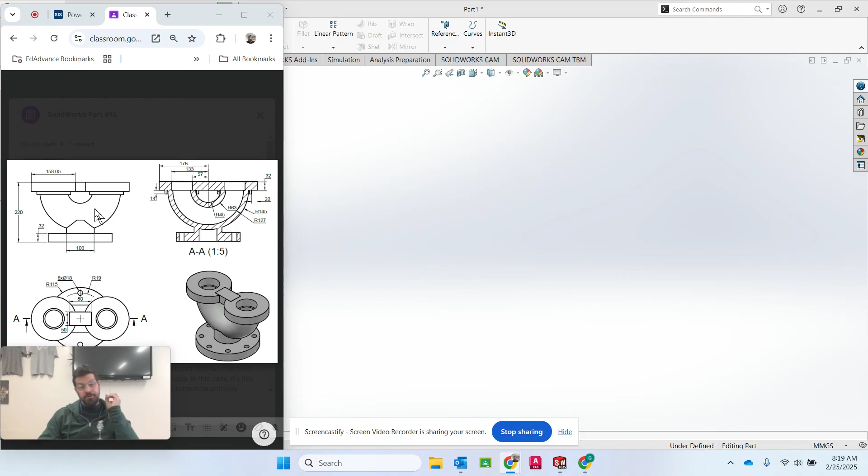And if you tried to figure it out on your own, it might take you forever. That's part of the purpose of these videos: to give you new tools and help you understand how SolidWorks can be used, so that you don't spend forever trying to figure out things on your own.

Okay, so I'm over here in SolidWorks, and I am going to teach you a new thing. So far we've done extrude boss base and extrude cuts. We've done revolved boss bases and revolved cuts.

Today we're going to do something called a swept boss base and a swept cut. Sweeping just means you're going to take whatever profile you want and sweep it along a path which you've defined by putting out a line somewhere.

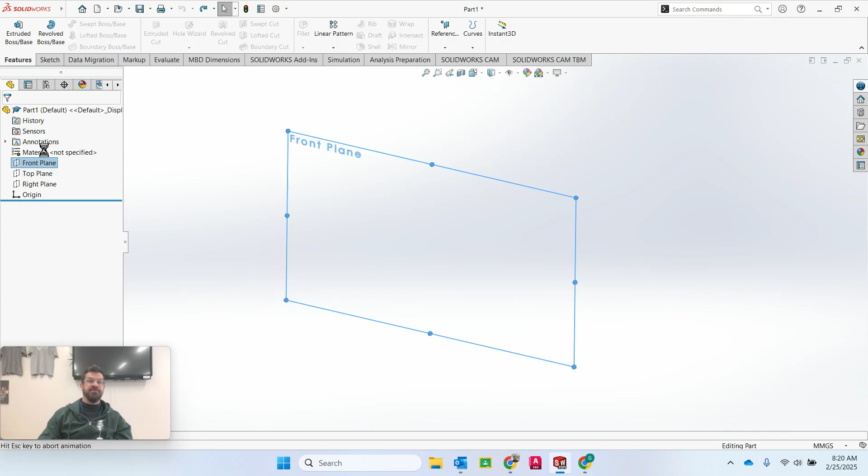Okay, so we're going to start here. I'm going to make a new sketch on the front plane. Let's just make a simple little circle, so it looks kind of like the tube on assignment number 15, right? I'm not going to bother to dimension it because I don't really care what the dimensions are here.

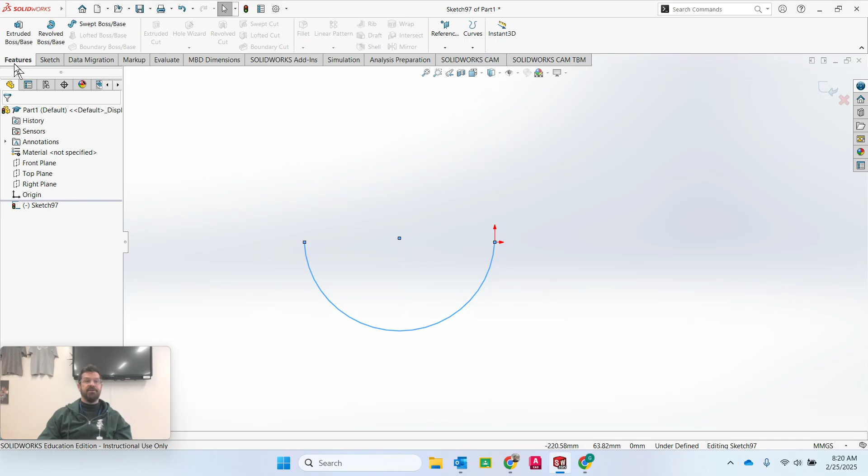So I got this semicircular line. It is a line, it has no depth, it has no solidity. It is just a line that is curved, right? And if I have a line that I want to serve as the pathway of a shape that I want to draw out along that pathway, I can go here to where it says swept boss base.

It sweeps a closed profile along an open or closed path to create a solid feature. So when I click on it, it gives me this dialog box over here on the left, with two choices first: sketch profile or circular profile. Let me just show you circular profile first because it's the simplest one. If I click on circular profile, you can see right away it took that line and made a circle around it, tracing a circle out all along the length of that curved line.

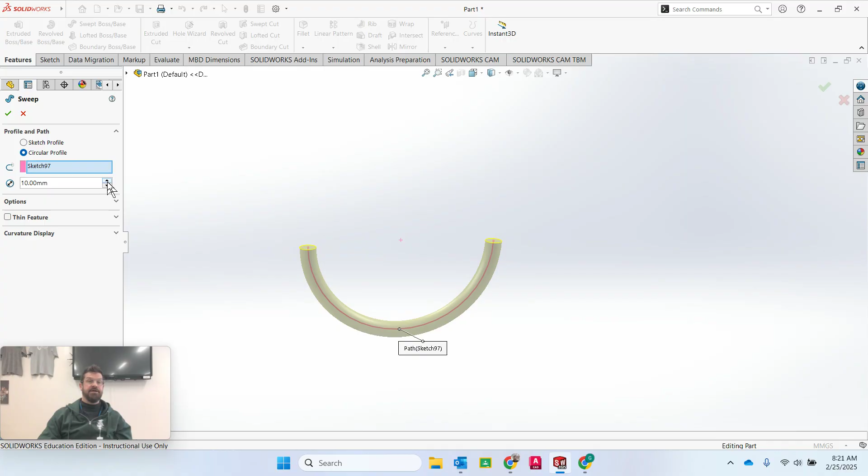It thinks of this as a solid feature, right? It is a solid tube, right? And I can change how thick it is, I can make it fatter. Eventually it's going to get so fat that SolidWorks can't figure out what to do with it because all the circles kind of join into each other. So that's too fat, let's just leave it as like 20, right?

Options, don't worry about these. Thin feature, let me talk to you really quickly because I know some of you have accidentally clicked on thin feature before. Thin feature takes a line and gives it some thickness as well. So if I click on this, you're going to see it took the line that made the circle. If I click it off, you'll see again there's this yellow line right here, and that's the line that is 20 millimeters around my sketch line.

If I click on thin feature, it's going to take that line and turn it into a line with a little bit of thickness, and the thickness is determined by whatever number's in here. So I can make that line a little bit thicker too if I want to. Let SolidWorks think about it for a second. All right, I can make it thicker or thinner.

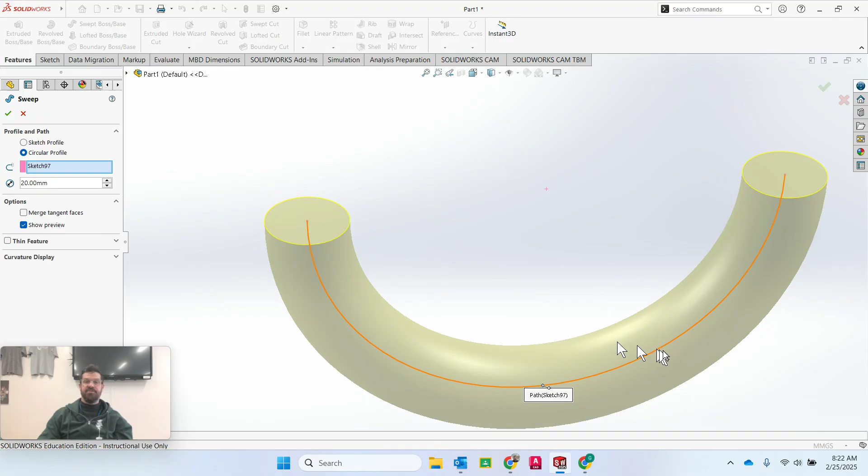I can make it one direction, I can make it two directions, I can make it mid-plane, just so it builds out from the center outward, and that's what that does. I don't want thin feature here, okay, so I'm going to click off of that. And so that's essentially what the swept boss base tool does.

Now let me show you this: it does not have to be a simple semicircular line or a straight line. I can take the spline tool, right, and I can go like, okay, boom, boom, boom, boom. I want to trace out some shape along this thing.

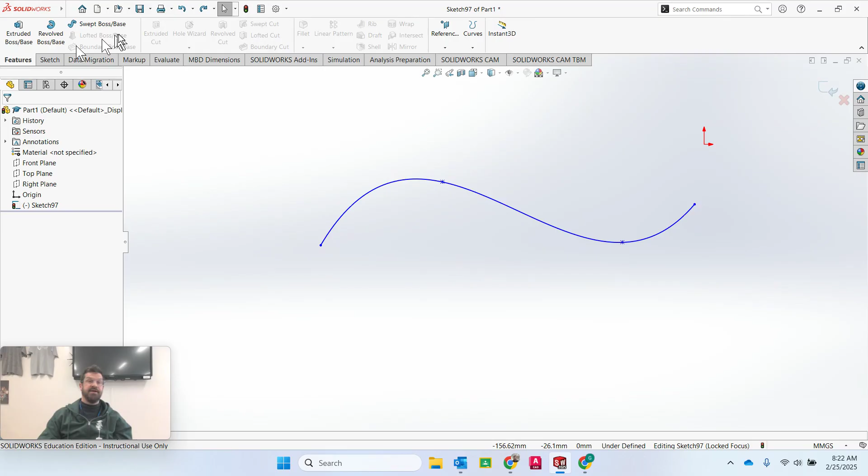So if I do swept boss base again, I can take this and do circular profile. And if I click on the pink line right here, you still need to select the path that I want it to trace out. It's circular, I'm going to click that, and it's going to trace out a little circle path along whatever line I've drawn. Okay.

The only time it runs into problems is if you have a bend in your pathway line that's really tight. Sometimes the bend is too tight for it to figure out what to do with, and you'd have to come up with a different solution.

So that's what happens when you take a circle profile and sweep it out along a line. It creates a solid shape that matches the shape you just did, okay?

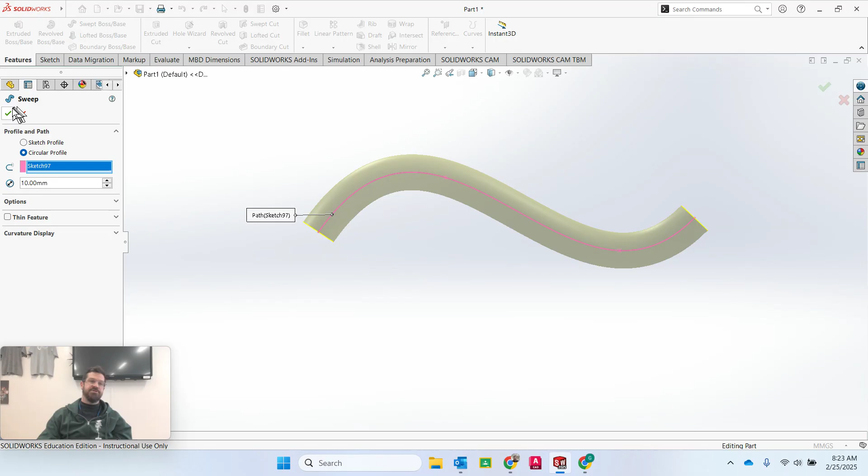Now let's take a second here and go back. So I got this, we'll leave that there, cool with this line, this spline, right? But say I want to trace out a more complex shape than just a circle. Sometimes you want to do something cooler.

So let's look at what happens if I want to trace, for example, a hexagon out along my line here, my spline. The first thing I have to do is draw my hexagon. My hexagon has to be located at the end of one of the points I'm trying to sweep it out along. Let's say I want to make a hexagon right here at that end point.

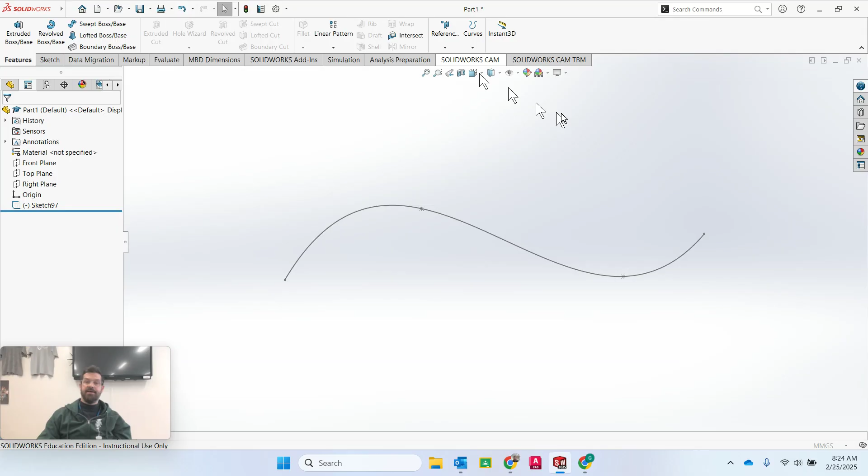So let's take a second to make a quick plane. I'm going to say my first reference point is the line, and the second reference point is the dot. And you can see it just made a plane for me right there. It's fully defined, I can hit OK.

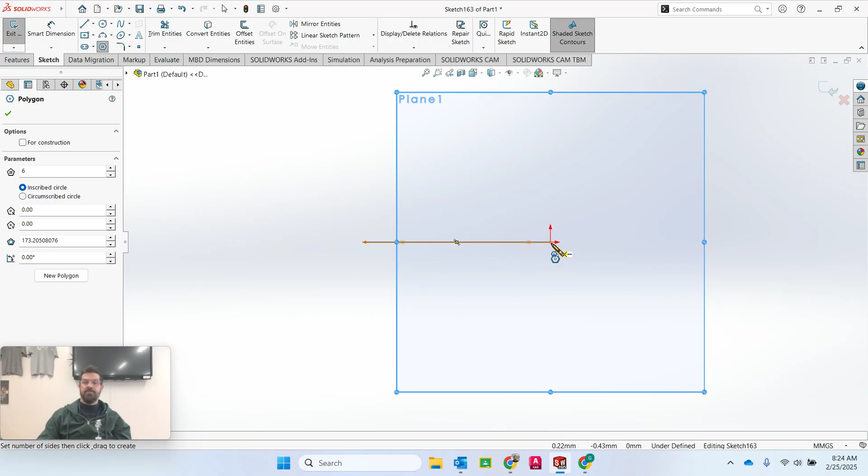Now if I want to take that plane and make a new sketch on it, I can do that. Let's say I want to make a hexagon, and I'm going to locate it right here. Make that horizontal. Excellent. I'm not going to bother to dimension it because I don't really care.

If I kind of move this around a bit, you see I have a hexagon located right along the end of that line. And let's say I want to sweep that hexagon along the length of the line.

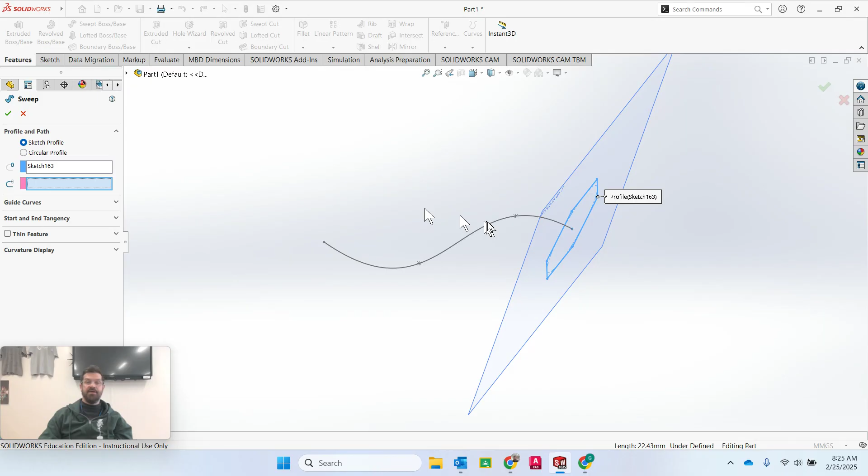I have to identify in this blue line what sketch I want to use. It already knows I want to do the sketch here, but you might have to pick on it. You might have to go into your feature tree for a second and figure out where the shape is that you want to sweep out. Then on the pink line you say what pathway you want it to sweep out along.

And you can do that, right? So all of a sudden it gives you the opportunity to sweep that hexagonal shape along the length of that thing.

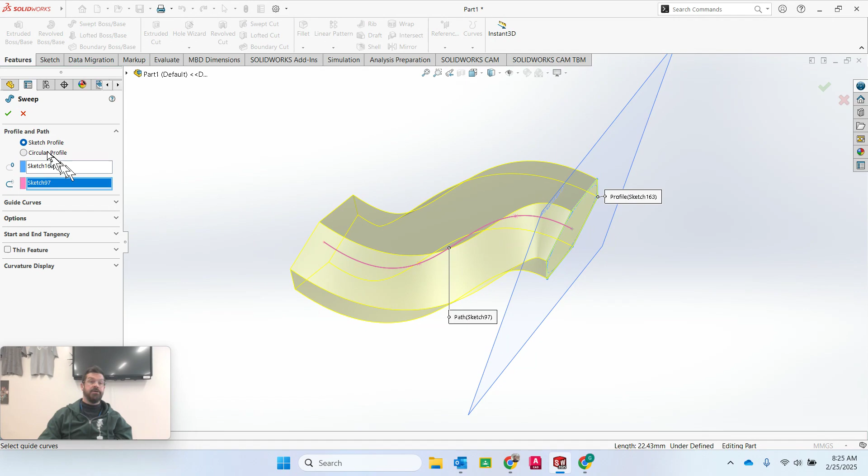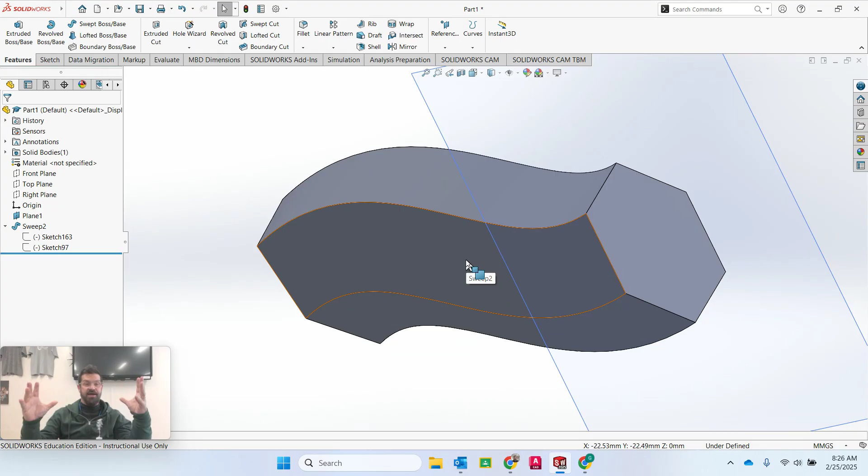If you want to change the underlying shape, you can. Let's see if I do this - if I change the actual sketch itself, if I go in here and edit the sketch, and I make it a little bit less curvy, it should rebuild so that the hexagon now traces out. It still follows that same line, but now that the line shape has changed, the hexagon shape has changed as well. Okay, so that is a swept boss base.

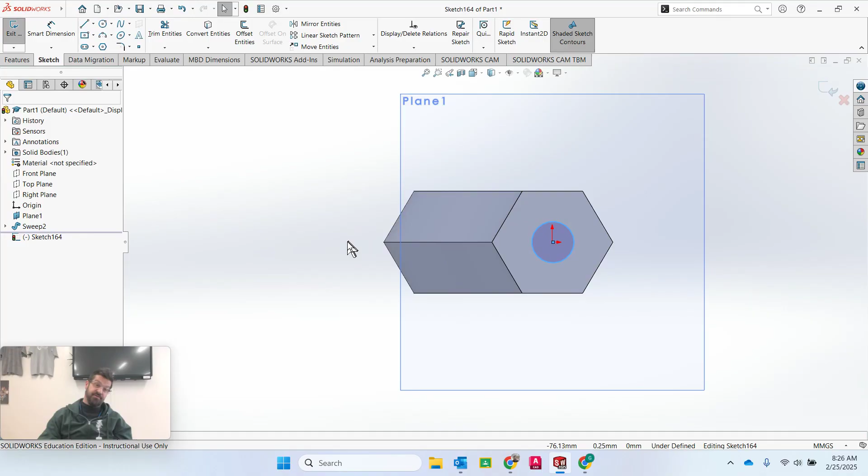One more thing I want to show you - say here I want to draw another thing on this, and I'm going to draw, let's just say, a circle now. I don't care enough to dimension it, but say I want to cut that circle out through the center of that swept boss base. So we did a swept boss base, and now I'm going to do a swept cut.

Boom. All right, and there you have it.

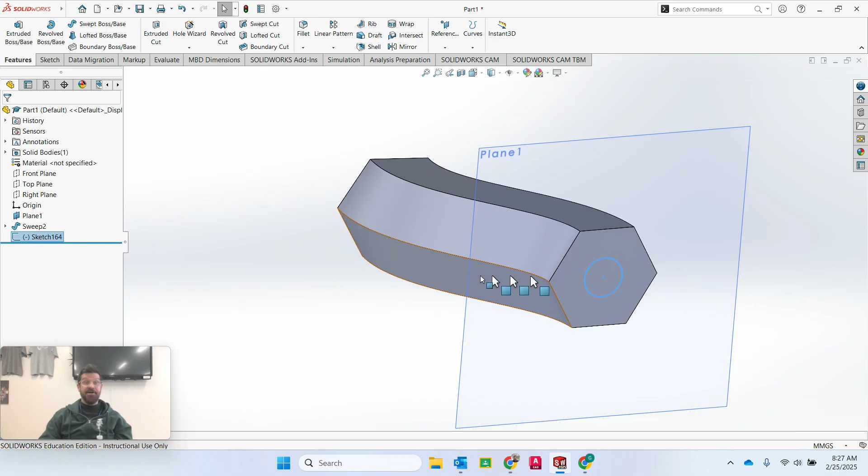Okay, so we're back, I got my shape. Now we're back - I have a circle, closed profile, and it's located along the end of my swept line again. So if I want to do a swept cut, I can do a swept cut.

So again, I'm going to say the sketch was 164, that's the one I just did. My line is still going to be my line. I can't really see my line anymore because it's hidden inside that shape, but if I go back in here, I can find that line again. There's my line, boom, and I can hit OK.

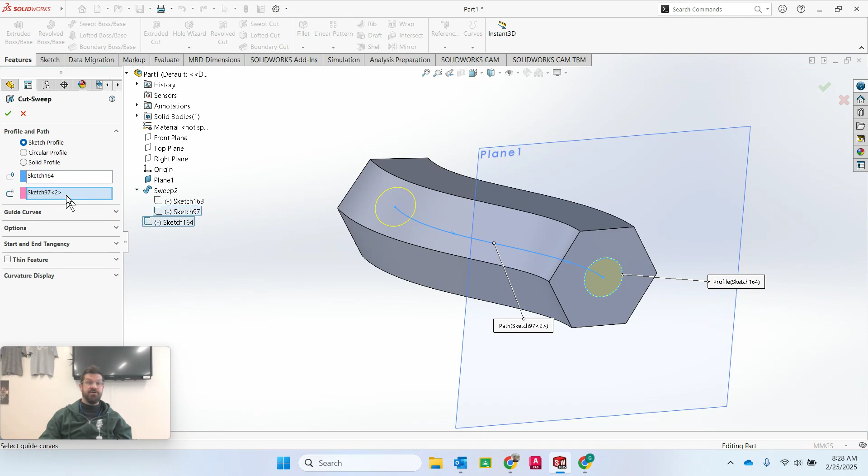So now it says I want to sketch, I'm going to cut out this sketch from this line. And you can see it now has the little hole that goes all the way through it, right through the center line.

And that's it. That's going to be super helpful today as you think about how you're trying to draw this tube. It's a semicircular tube - that circle gets traced out along the length of that pathway. So that's a swept boss base and a swept cut.